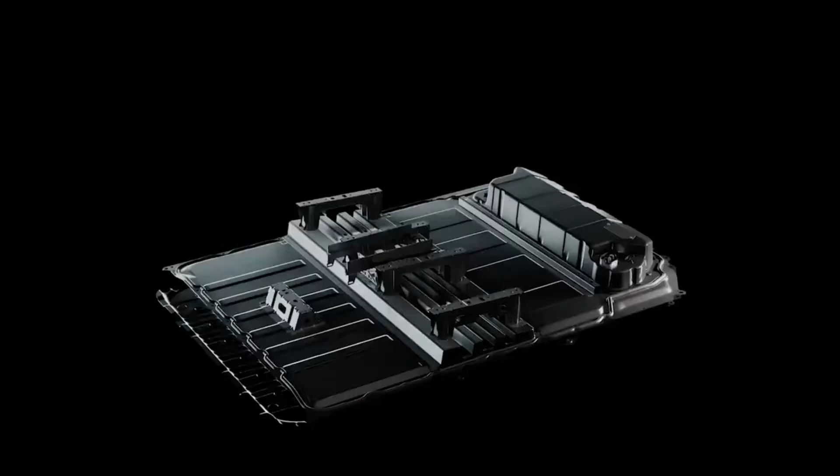Game over. The new Tesla 4680 battery is genius.

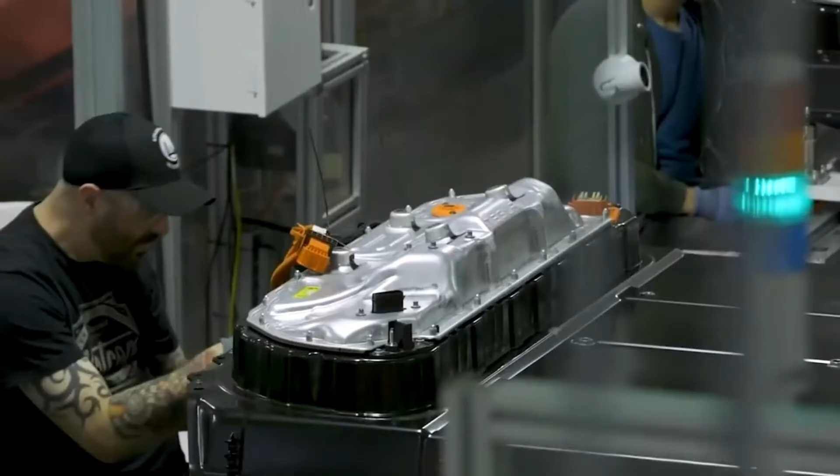And here's why. At the ceremony, Elon Musk threw a loud celebration to celebrate the inauguration of the Giga Berlin Brandenburg facility, as well as pledging to release the first European Tesla Model Y next month. For this electric vehicle, Musk also demonstrated a revolutionary battery architecture.

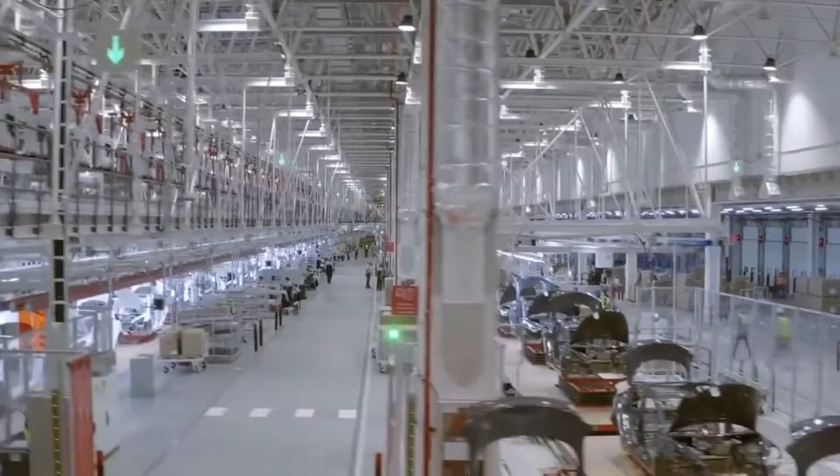Engineers completely modified the battery pack to accommodate the additional 4680 cells. Elon Musk previously discussed the advantages of the new body construction, which will be standard on German-built Model Y crossovers, which uses a structural battery and two one-piece bases to cut weight by 10% and boost the electric vehicle's range by 14%. Not to mention the assembling procedure, which was sped up by reducing 370 pieces, lowering the number of components required. For a long time, machinery for the construction of solid body bases has been installed at a German company, but it is only now that the upgraded structure has been seen in action.

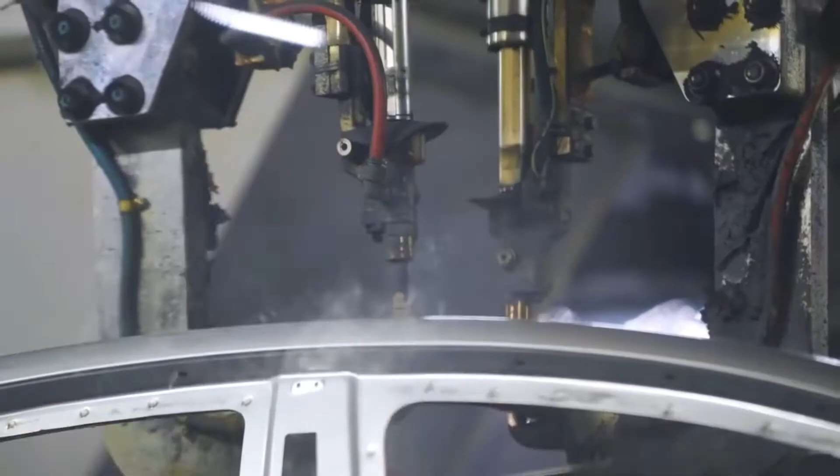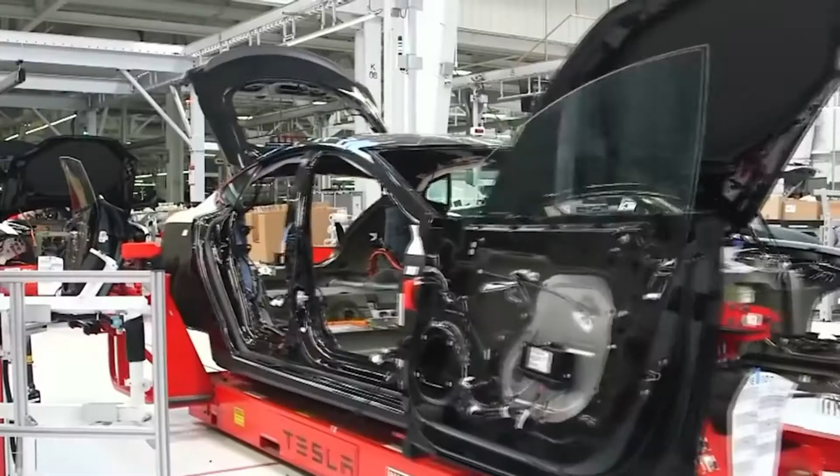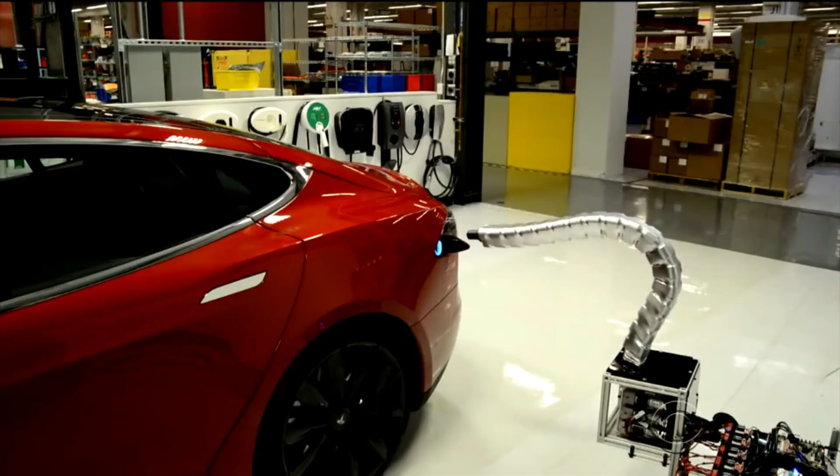The new body structure of Tesla is unique. The 4680 battery pack serves as a structural part of the base's bodywork, connecting the front and back. The pack is an important component that, to some degree, facilitates the process of putting together an electric car. It does make body repairs more difficult.

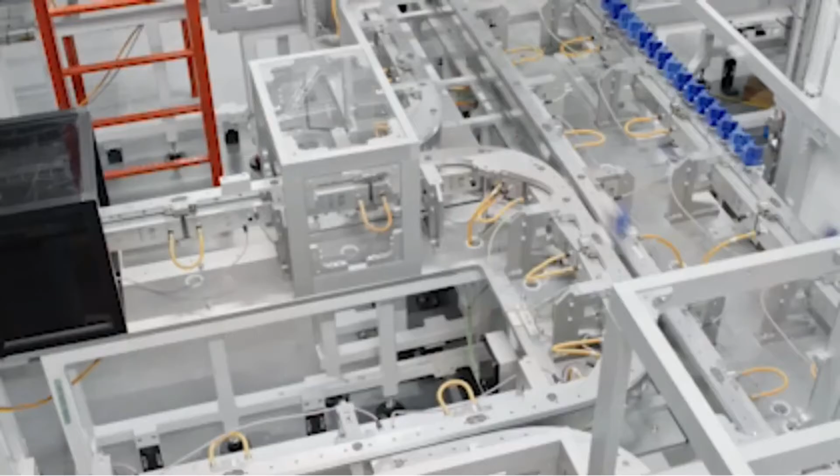The seat bases are also connected to the battery pack, which enhances the design's manufacturability and streamlines the electric vehicle's assembly process. During the Giga Fest on October 9th, Tesla showcased 4680 battery cells. These battery cells are also referred to as the company's most current, finest engineering, since they are built for extended life, durability, power, and cost.

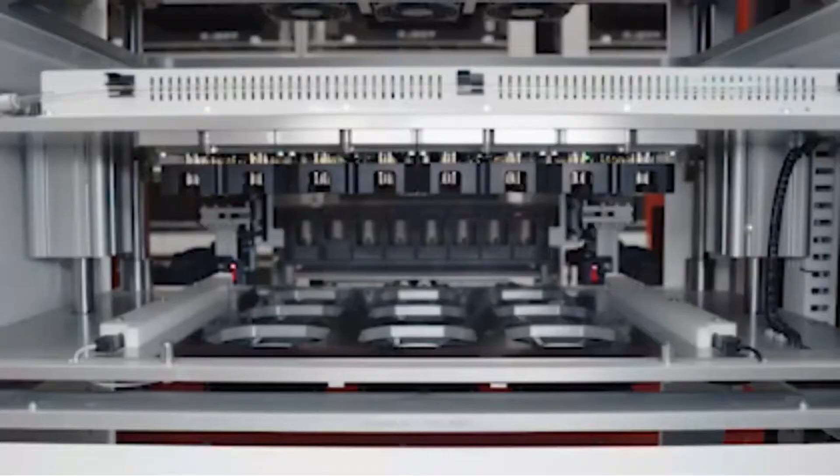Last year, during the Tesla Battery Day event, the 4680 structural battery pack was initially exhibited. This battery pack reduces the vehicle's bulk while increasing its stiffness and safety. Following Giga Shanghai, these battery packs will be produced and tested at Giga Texas. The next large plant in the pipeline is Giga Berlin.

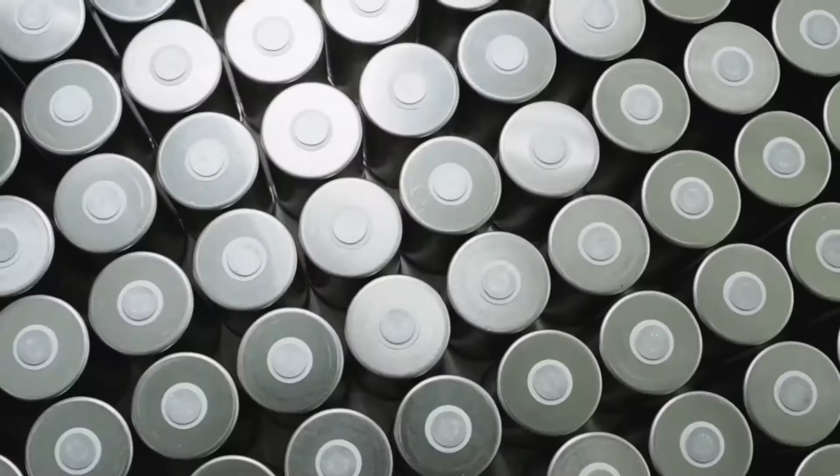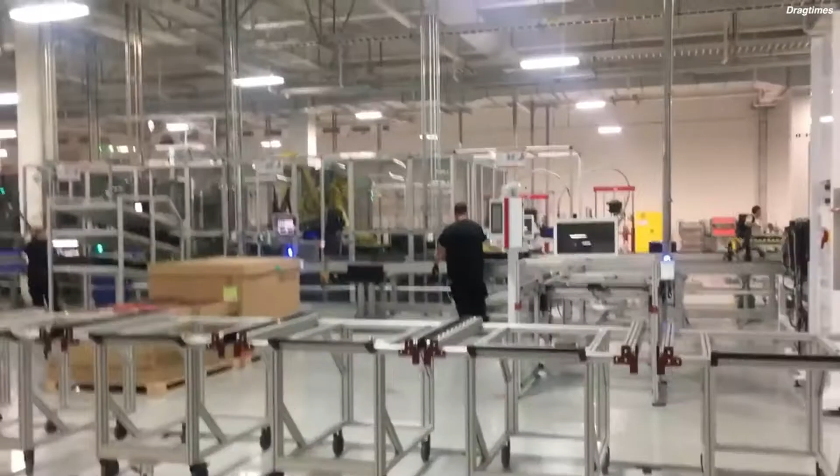The revised battery design and the new 4680 cells will shape the upcoming Tesla Model Y, which will mostly be produced in Berlin later this year. EV enthusiasts were able to see many of the design and production breakthroughs that will premiere at Giga Berlin. Tesla's new structural battery pack, on the other hand, was the showstopper.

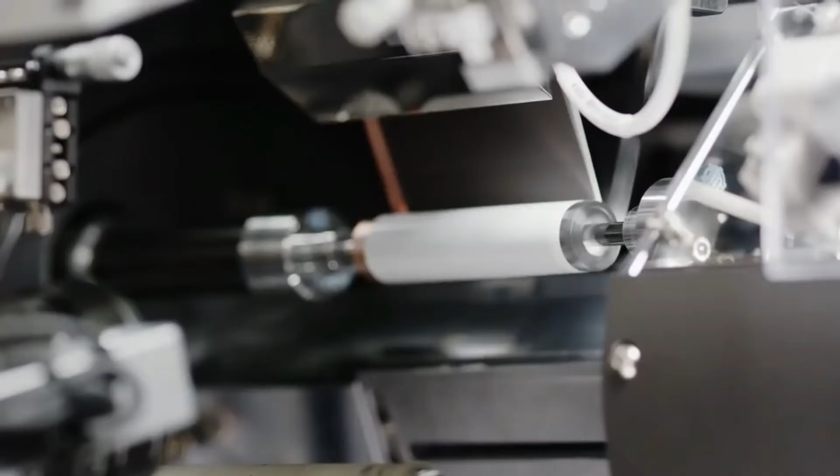A cutaway version of the pack was on display, demonstrating how the new 4680 cells are organized in the pack. Tesla claims that its 4680 cells will have a greater energy density and better thermal stability than the 2170 cells from the previous generation. The business is apparently working on ramping them up to mass production on a prototype plant in California.

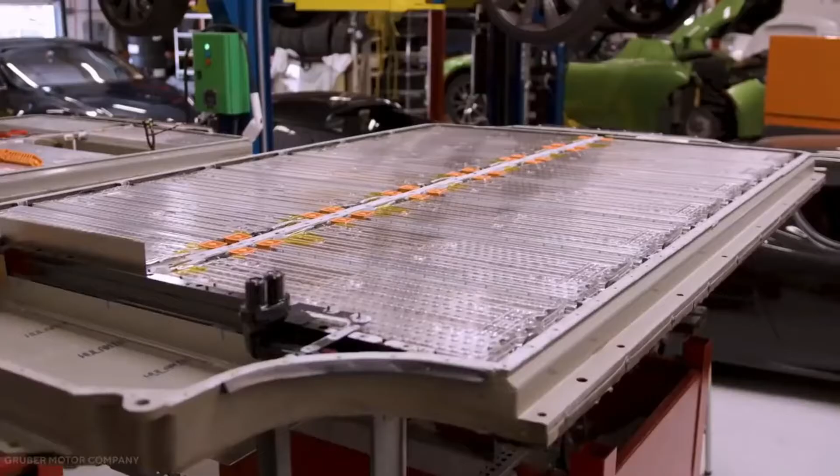The new battery pack has a cell-to-pack architecture that eliminates battery modules, making it easier and less expensive to build underbody structural strength and allowing it to be linked to Tesla's huge single-piece front and rear underbody castings, further lowering complexity and expense.

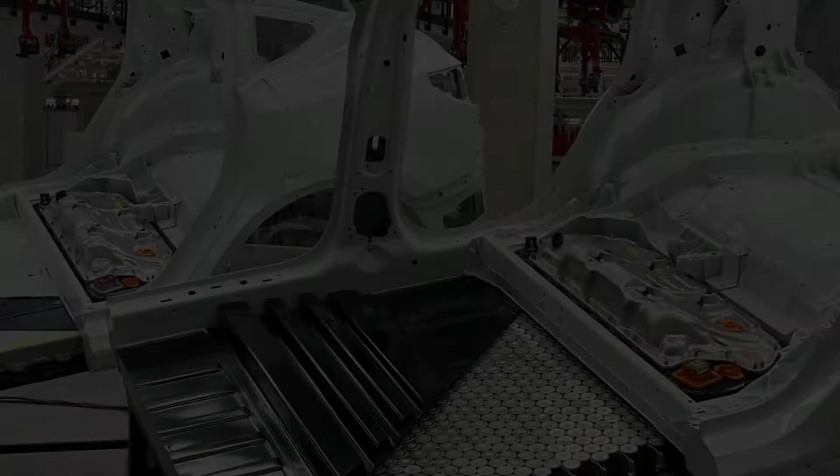The car seats will be directly installed on the battery pack. The body will then be lowered onto the chassis around the seats by Tesla's engineers. The assembling procedure has been greatly simplified.

Tesla devotees are sifting through the party photos and delving into the arcana of the new battery pack design. The cooling mechanism on the new pack looks to be somewhat simpler. As with the 2170 pack, cooling channels snake between the rows of cells, although it's unclear if there will be top and bottom cooling as well.

Some people believe the new pack is made to be more readily recyclable, which is a plausible assumption, given Tesla's increasing focus on the battery's end-of-life phase.

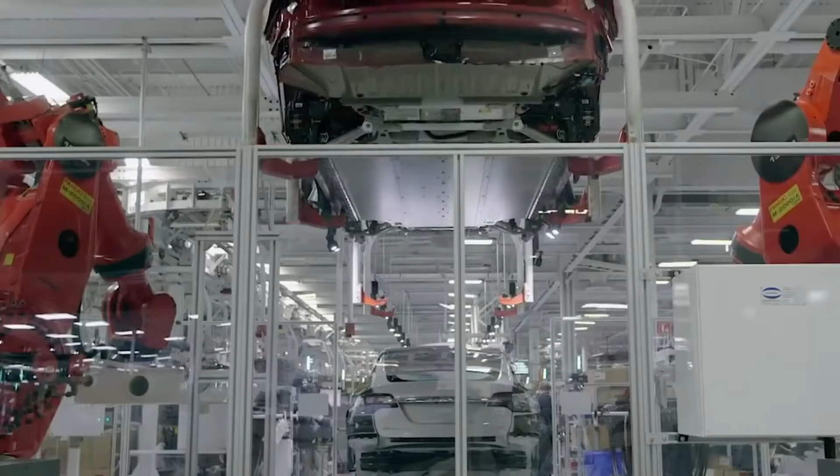If all goes according to plan, the Berlin Giga plant will start manufacturing models in November, with customer deliveries beginning in December. Tesla has been working on its 4680 battery cells for over a year, and the world's most valuable automaker teased the production of these next-generation battery cells at the launch party for its Berlin Giga factory.

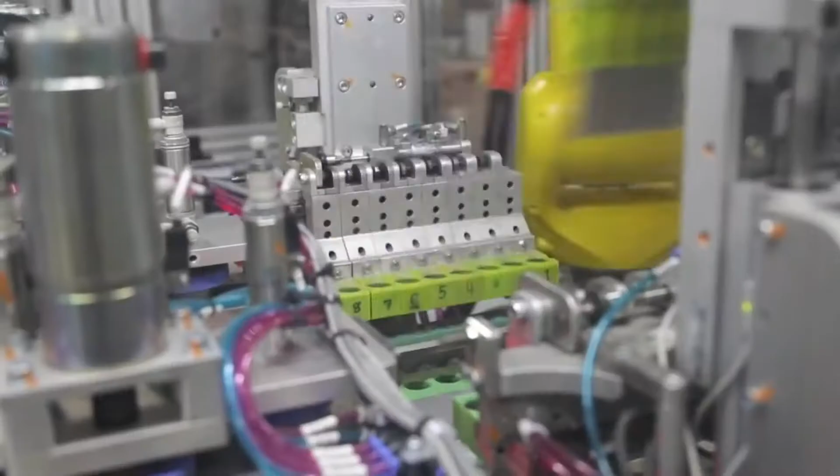These next-generation battery cells will make electric cars cheaper with better range and faster charging. The Model Y, which has become one of Tesla's best-selling vehicles and is expected to soon overtake the Model 3 in sales, is expected to be the first vehicle to leave the Berlin Giga plant.

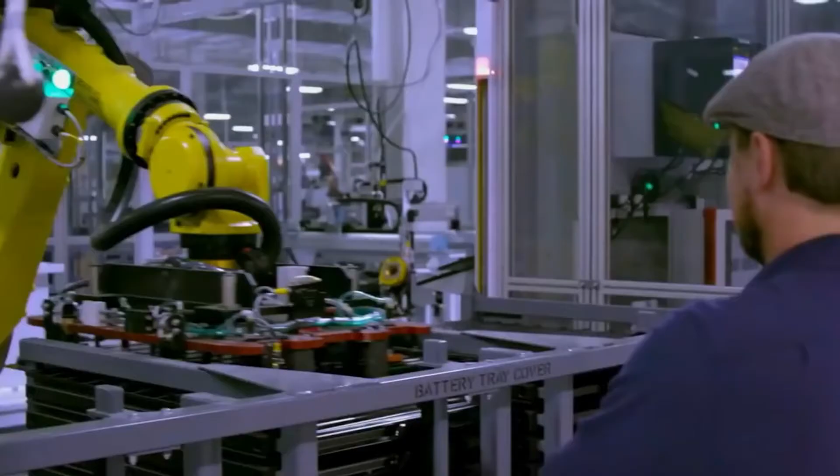Elon Musk has announced the power of the Tesla Model Y and the 4680 battery packs. By the end of 2022, 5,000 cells per week might be produced, if not 10,000 every week.

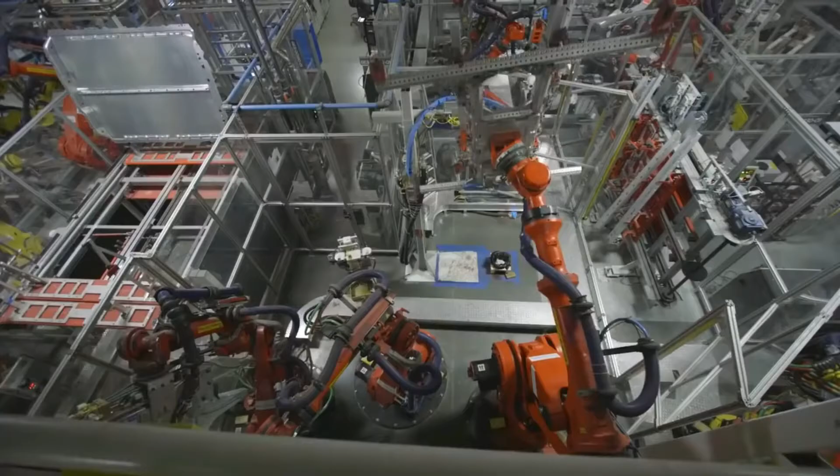Tesla's objective of mass producing its 4680 battery cells took a major step ahead on Wednesday when New Caledonian miner Prony Resources said the EV company has contracted to buy 42,000 tons of nickel over a multi-year period.

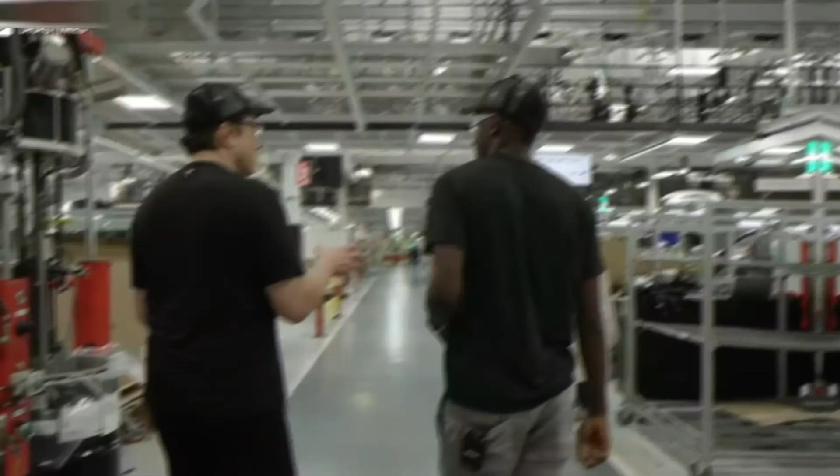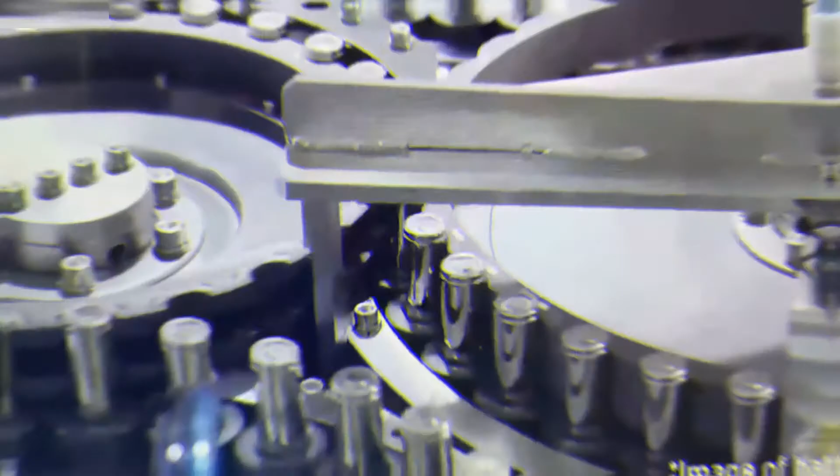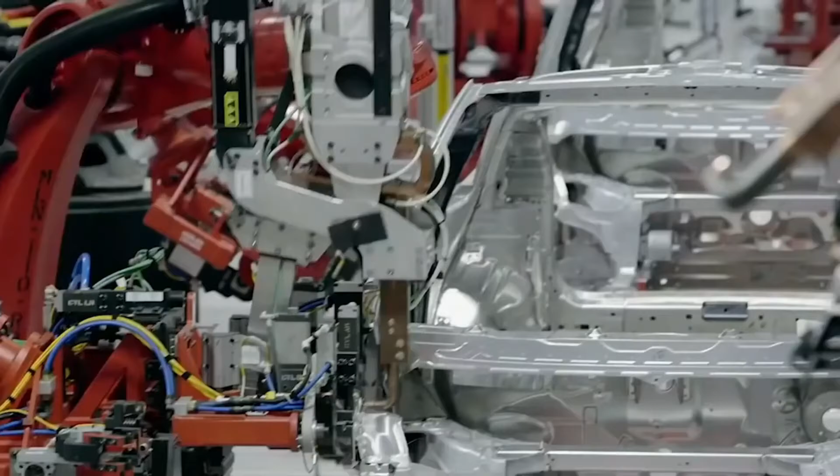During a press conference held by Antonin Beurrier, Prony's chief executive revealed that Tesla is now the mining company's biggest customer to date, although he didn't go into detail about the contract. Beurrier indicated that the 42,000 tons for EV manufacturers was an estimate and may change. Prony's nickel supply arrangement with Tesla was arranged by Trafigura, a stakeholder in the mining company.

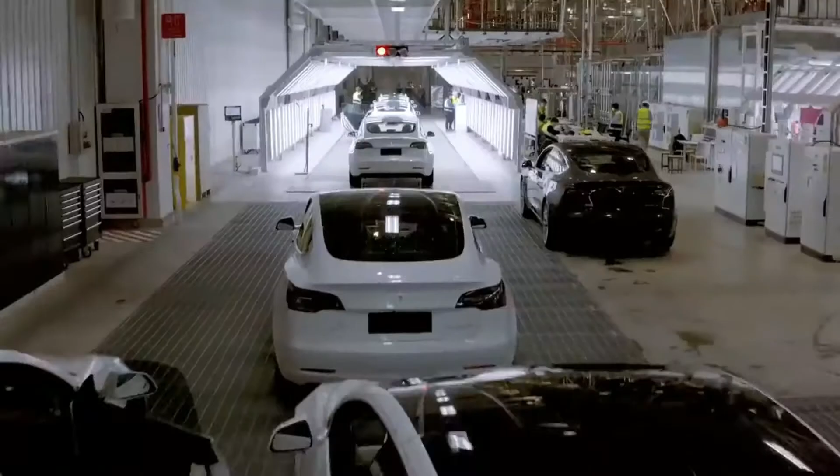According to the CEO, last month Elon Musk also struck an agreement with Prony. Tesla and Prony, interestingly enough, had previously been linked before their newly publicized nickel agreement, as the electric vehicle manufacturer had advised the miner on product and sustainability criteria.

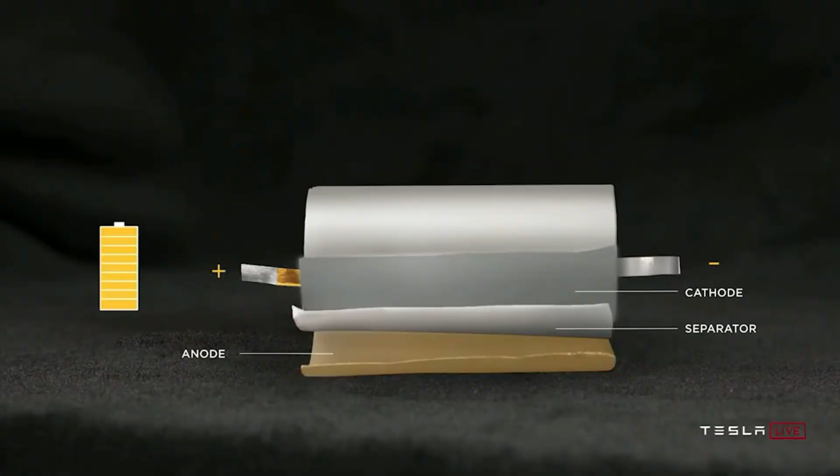In its position as a vital nickel source for Tesla, Prony isn't alone. Tesla secured an agreement earlier this year to buy nickel from BHP's Australian facilities, which is important given Tesla's ambition of building up its car and energy storage products in future years. It wouldn't be shocking if the corporation signs numerous additional agreements with nickel suppliers in the near future.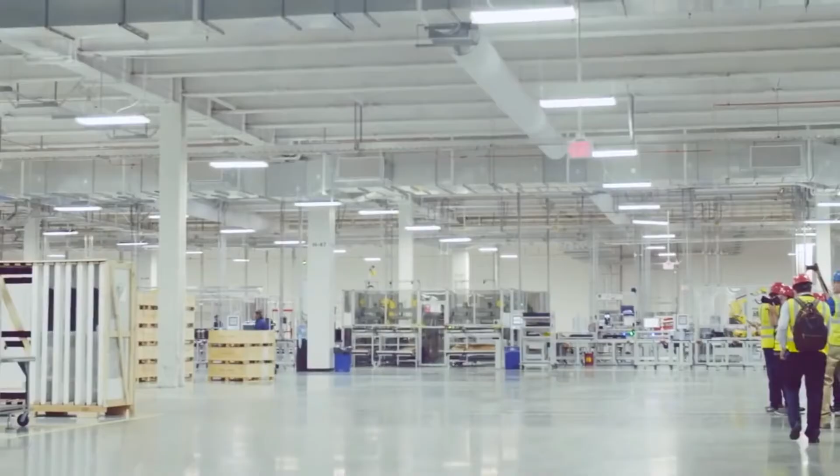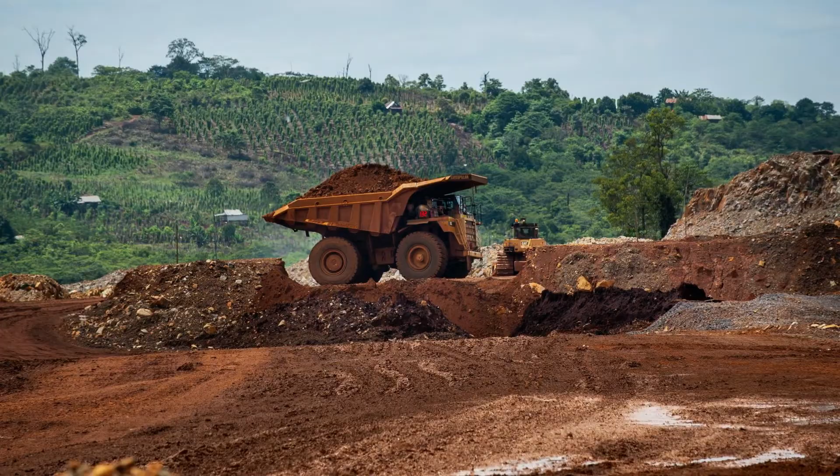After all, Tesla CEO Elon Musk has said that nickel would be a major component in the company's long-range car batteries. I'd want to re-emphasize that any mining company out there should mine additional nickel, regardless of where they are in the globe, compared to what they experienced 5 years ago. Go for high-volume nickel mining that is both efficient and ecologically beneficial. If you mine nickel effectively and in an ecologically friendly way, Tesla will grant you a huge contract for a long time.

Last year's Battery Day event saw the formal presentation of the company's bespoke 4680 cells, and Musk announced as much. Tesla's CEO has remained steadfast in his pro-nickel position.

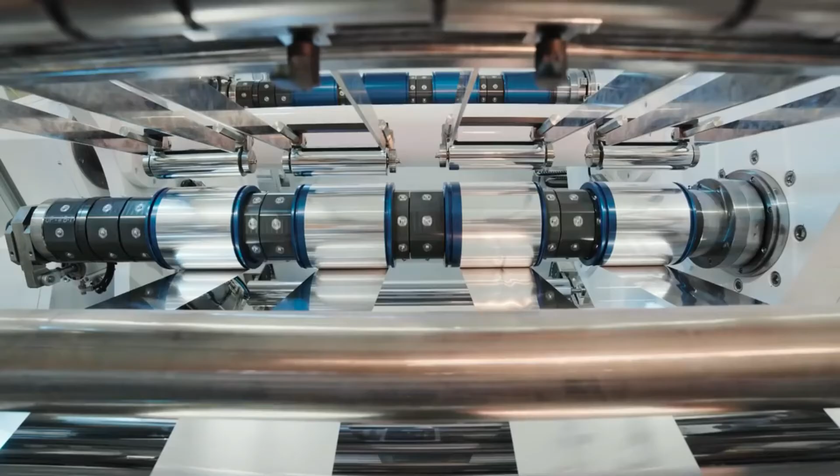Musk emphasized during the company's recent 2021 annual shareholder meeting that the company's most demanding vehicles, including the Cybertruck and Tesla Semi, will have a nickel-based cathode. The Tesla CEO also said that cells with an iron-based cathode would be used in the company's standard range automobiles and battery storage solutions. Our long-range vehicles employ a nickel-based cathode, which is what counts, but just for cars in the ordinary range and stationary storage, the cathode is made of iron.

Musk said the following: Rock Tech Lithium, located in Canada, has announced the development of Europe's first lithium refining factory in Brandenburg, Germany. It intends to manufacture battery-grade lithium hydroxide for lithium-ion batteries, making it an ideal match with Tesla Giga Berlin, which is just 60 kilometers, or 37 miles, away.

Rock Tech Lithium said in a news statement that it aims to spend up to 470 million euros, $545 million, on all of its industrial units at the Guben location. The converter plant is expected to be completed by 2024, and the business predicts that it will need roughly 160 technicians, engineers, and manufacturing workers to run the whole plant.

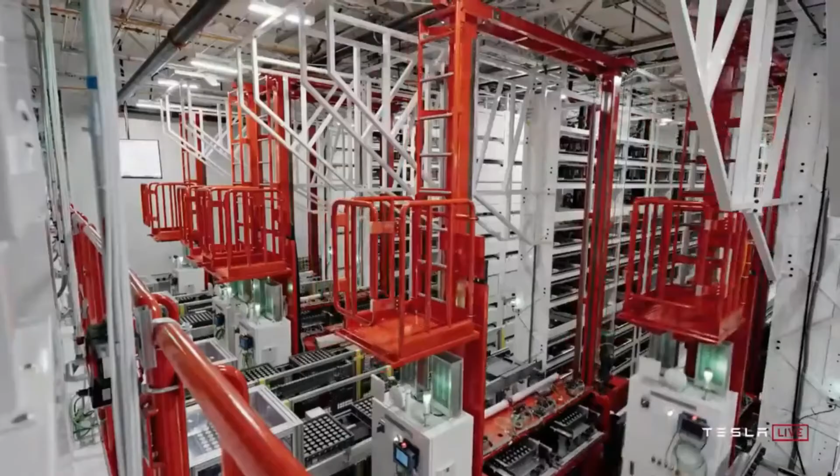The Tesla Giga Berlin factory is just 60 kilometers away, with a manufacturing target of 500,000 automobiles per year. At Tesla's recent GigaFest Country Fair in Brandenburg, CEO Elon Musk said that Giga Berlin would take around a year to achieve full manufacturing capacity.

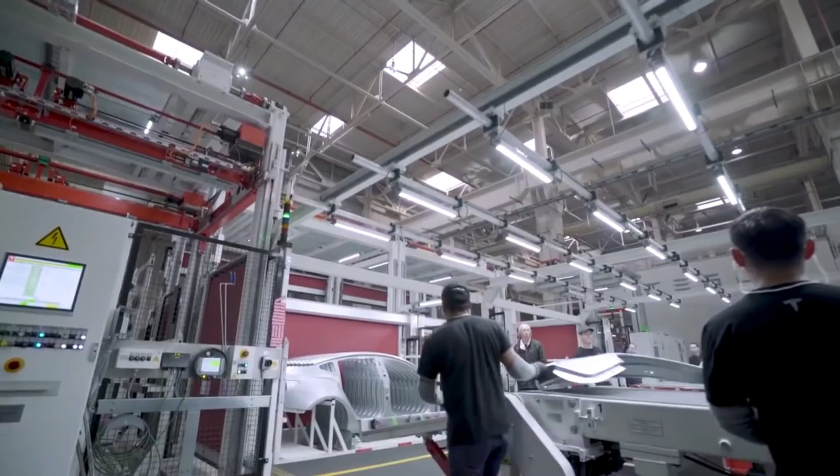The firm published a banner that said one automobile body will be produced every 45 seconds. According to Elon Musk, Giga Berlin could produce 10,000 automobiles per week if it worked 24 hours a day, equating to 520,000 cars per year. Tesla intends to manufacture its 4680 cells in Brandenburg in addition to automobiles, and it will need to develop a supply chain to manufacture batteries.